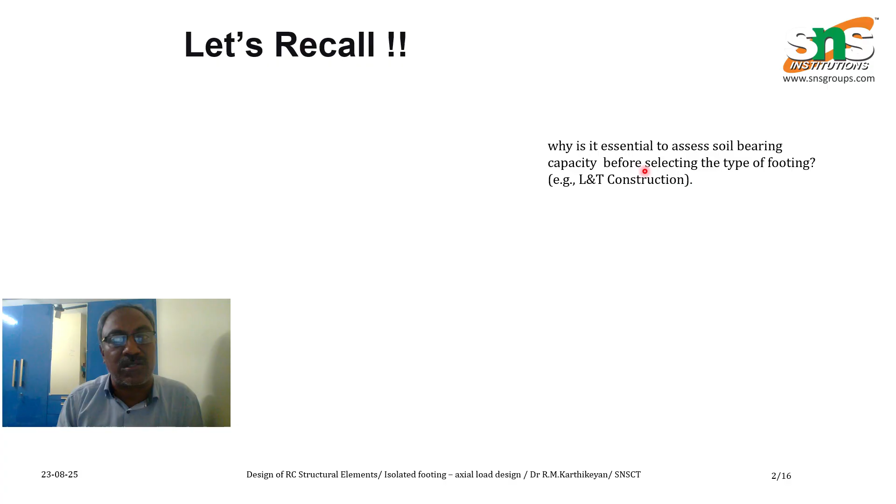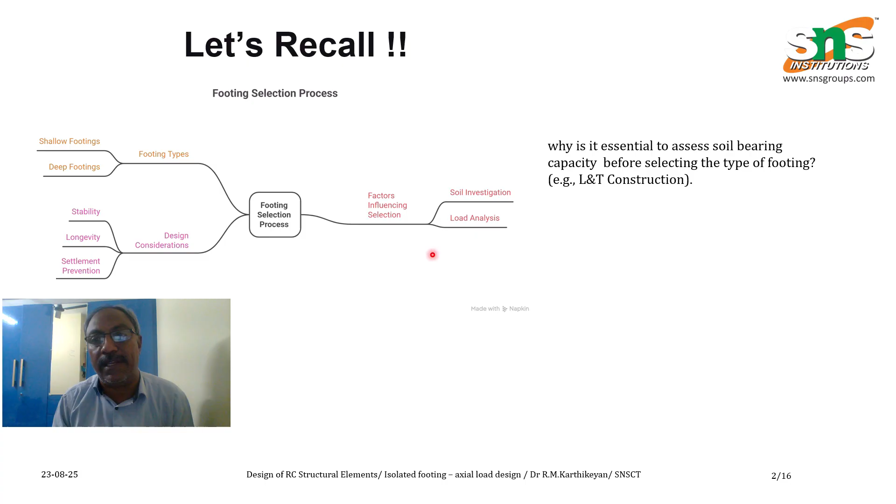Let's recall. Last class we discussed footings and types of footings - what is footing, where it is used, and the types of footings. In industrial applications, we use heavy foundations, and we install deep foundations.

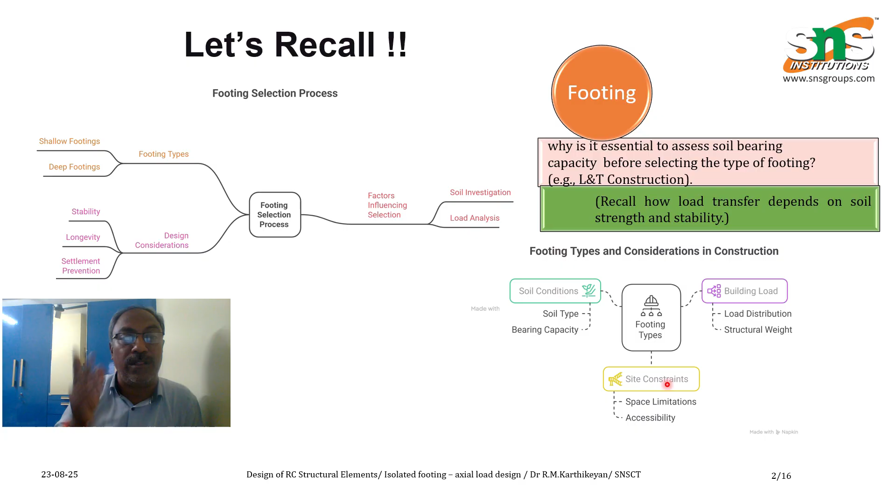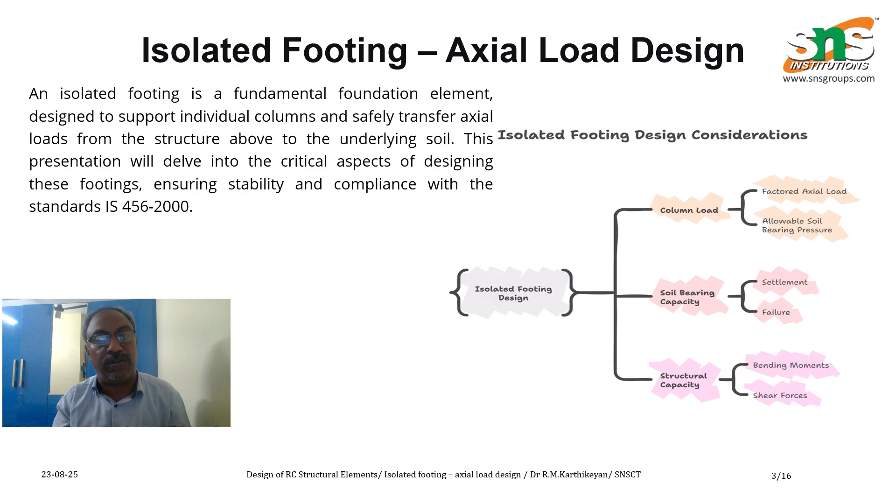So, isolated footing - today we are going to discuss the isolated footing. It is an axially loaded fundamental foundation element designed to support individual columns and safely transmit load to the earth. Today's topic is isolated footing under axial loading, understanding design principles and axial loading.

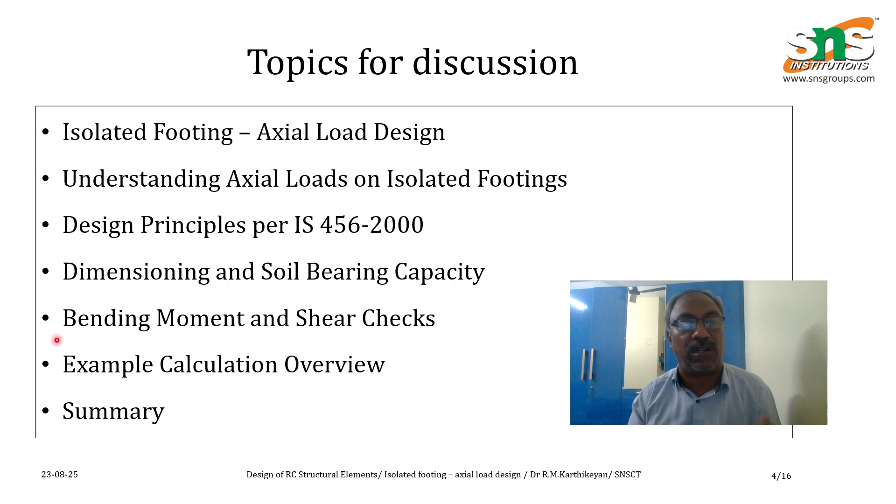Vertical loads distribute to the components, determining size and reinforcement required. In this diagram, left and right show that. Some parameters are taken for the design, including bearing capacity, stresses, and load distribution.

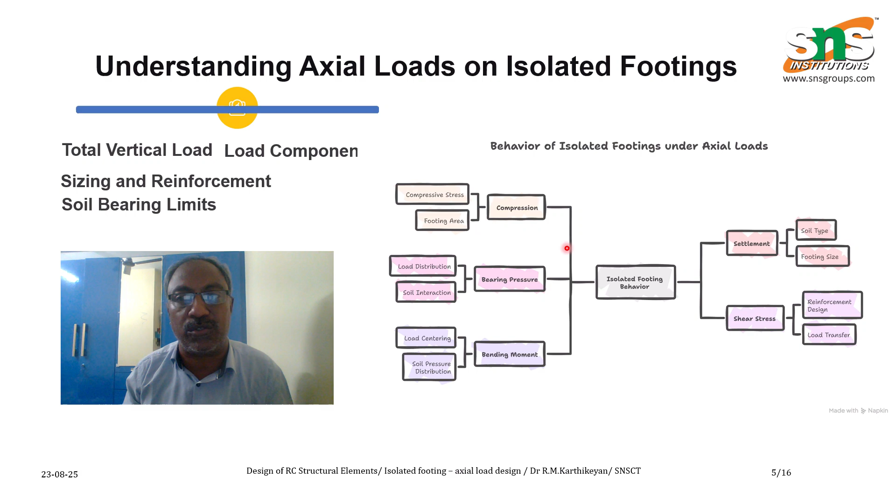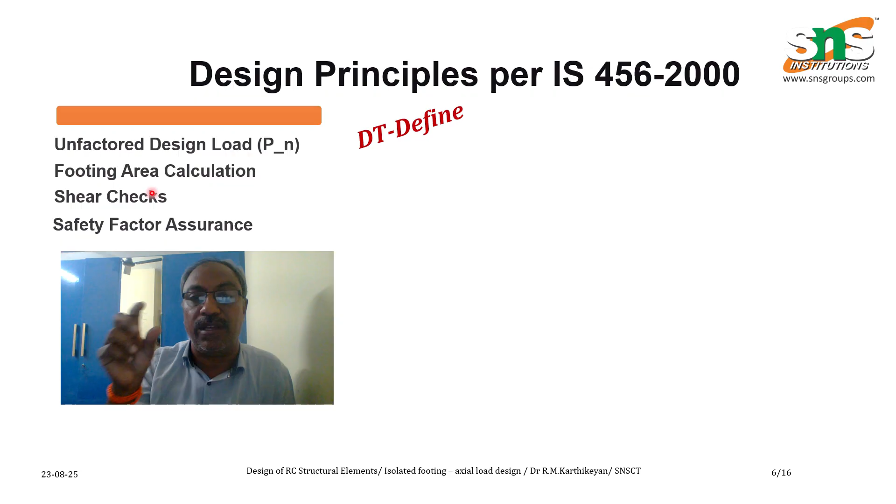What are the difficulties or problems facing these designs? The solution, as per IS 456, is to define all the data using unfactored design load, footing area calculation, shear checks, and safety factor assurance.

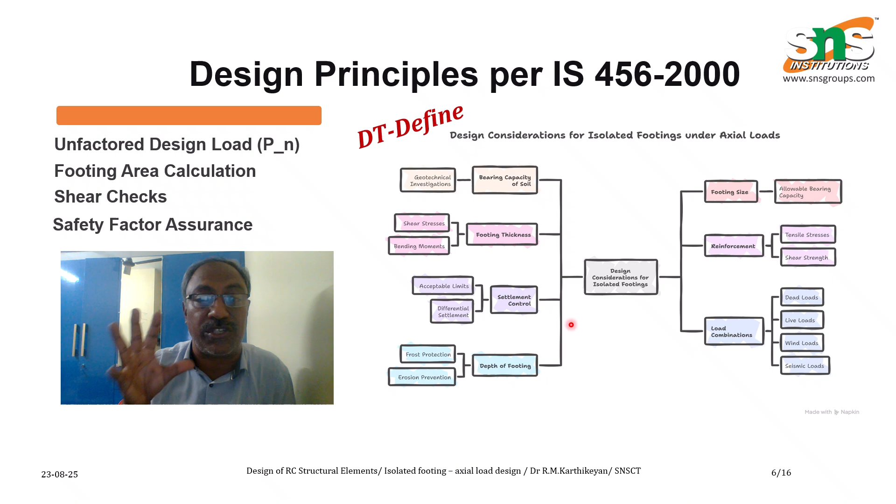In this part, it shows that the footing has shear. So in this defined part, we have to check for shear checks, dimensions, and soil bearing capacity.

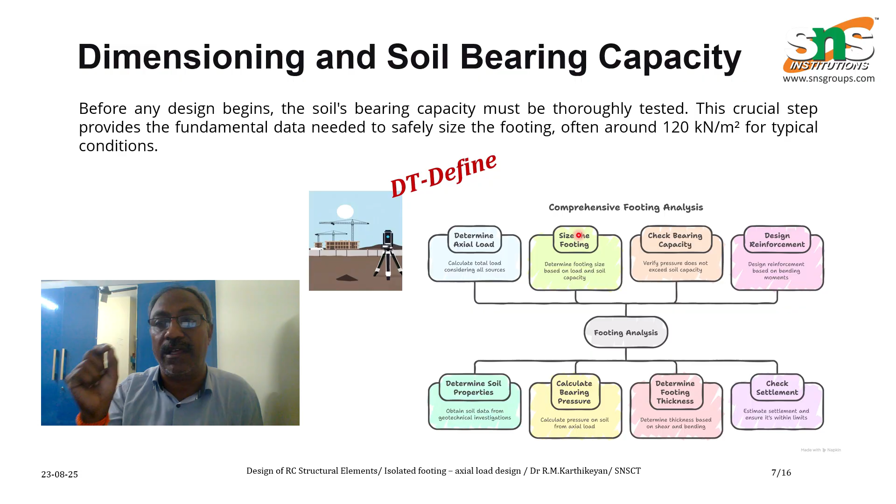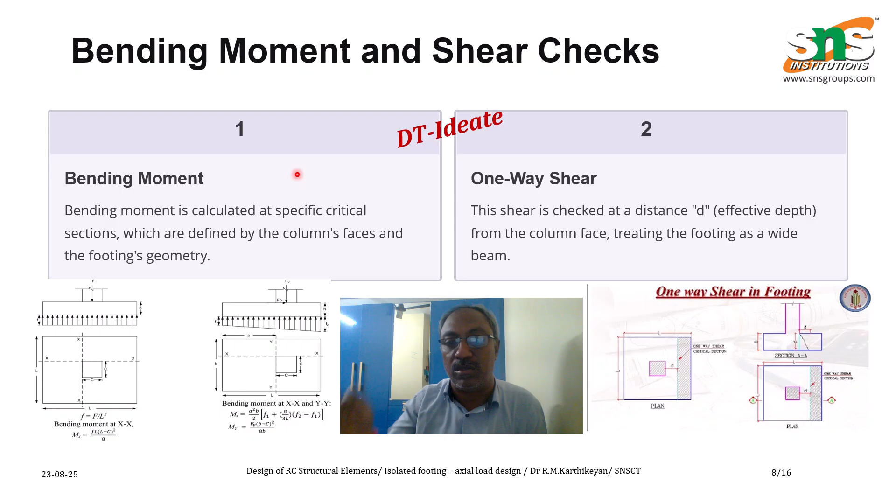One way shear occurs in the column on one side - it is the one way shear throughout the depth. Figure number 2 shows that.

Now we are going to the third and fourth part - how two-way shear works and what parameters are used from the IS 456:2000 formulas. Two-way shear occurs around the column - it is called two-way shear.

It is also called punching shear. One way shear is not punching shear - it occurs only on one side of the column.

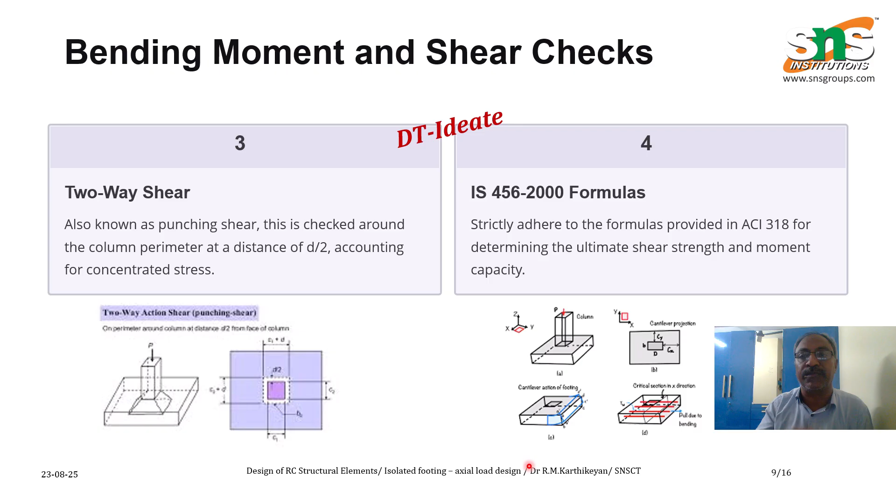Reinforcement for the axially loaded columns - the reinforcement is designed with steel reinforcement strategically placed following effective stresses required, calculated based on the bending moment and shear forces. Following factors are considered for this.

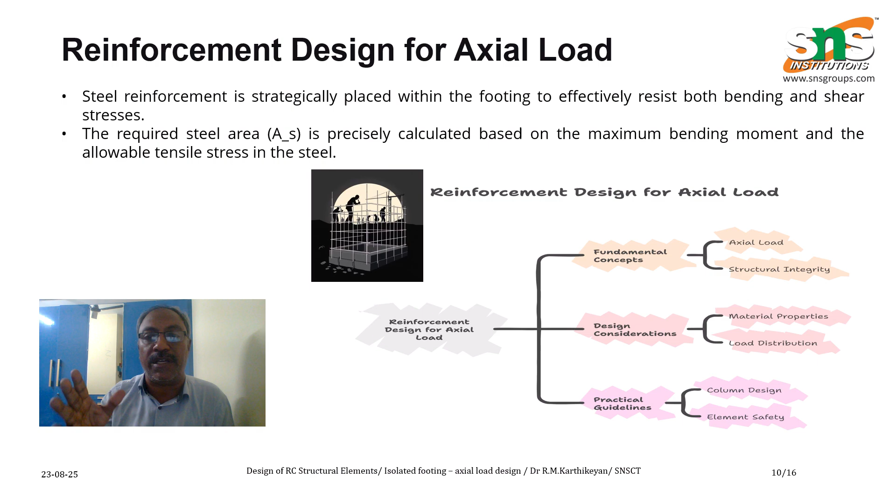Example of calculation: column load has 1219 kilonewton design, with soil capacity as the safe bearing capacity. Now let's see this simplified example to illustrate.

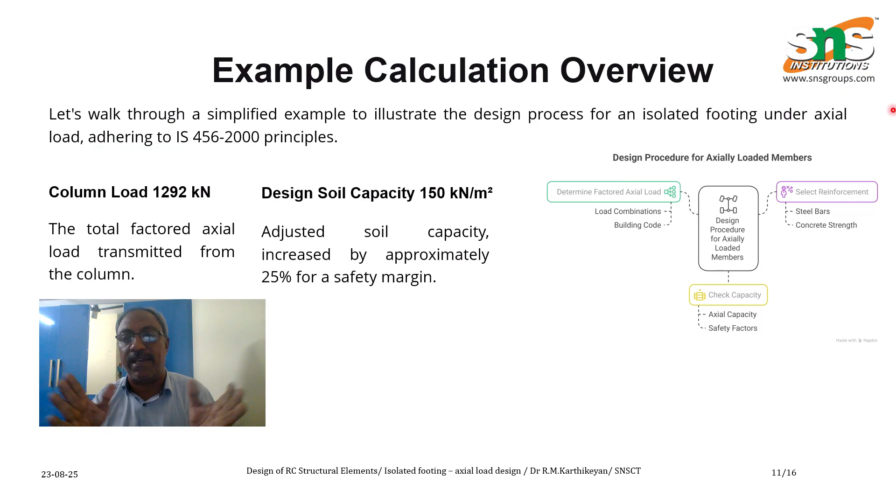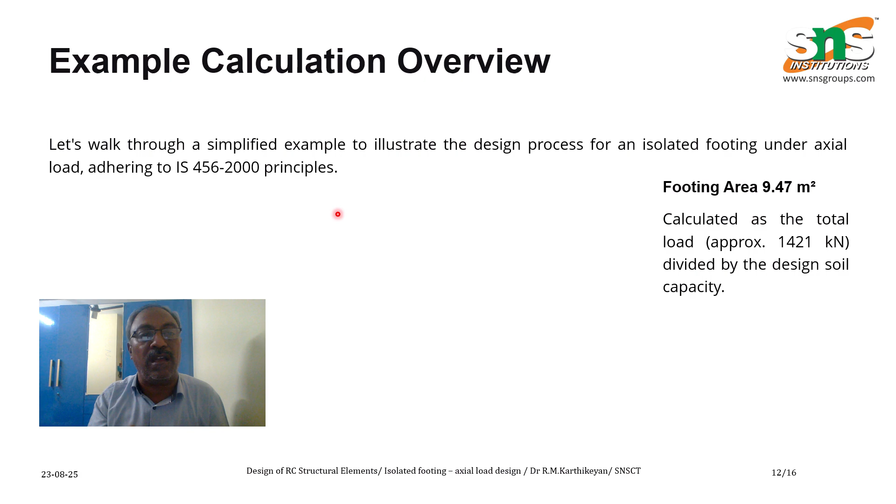Now let's see what parameters are taken, and next we see the footing area is calculated as 9.47 meter square. Assuming the length or breadth, it will come out as square or rectangular automatically. Now for the conclusion and key takeaways.

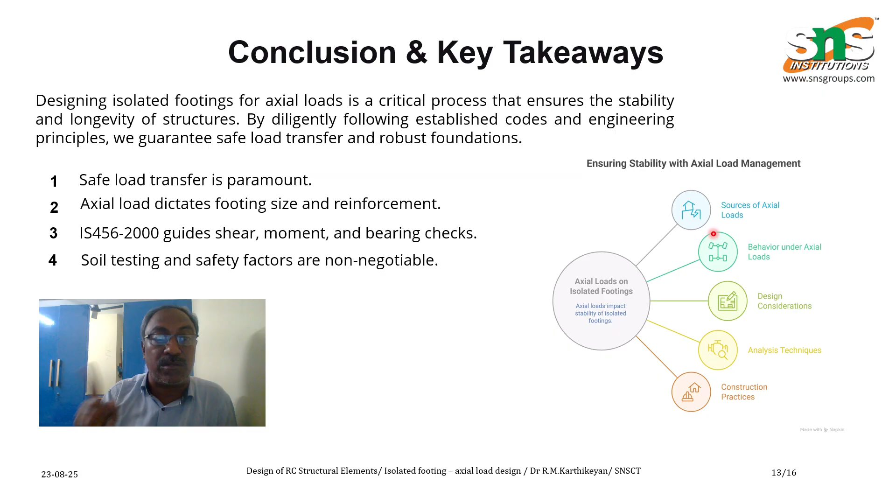Safe load transfer to the isolated axial loading reinforcement per IS 456, and soil testing safety factor are non-negotiable because of heavy reinforcement. Now I am going to ask some quiz questions on what we discussed.

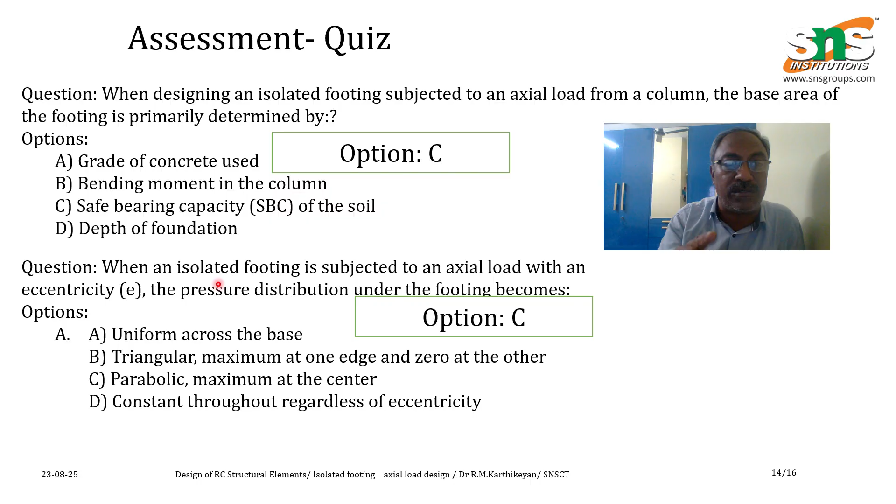And in the next video, we will see the slender column - how the slender column works and is used.